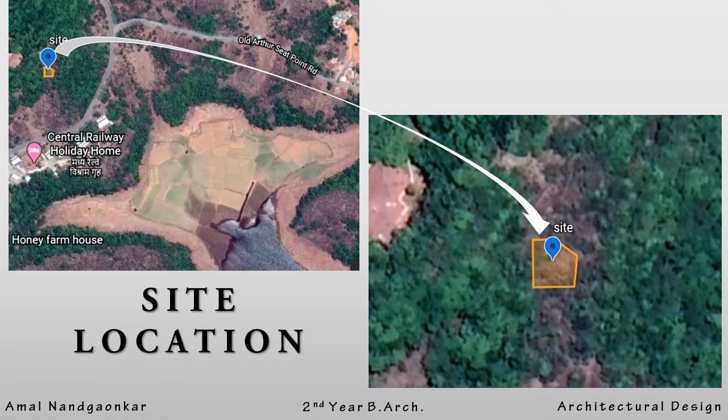The site was located near Venna Lake, had a pentagonal shape, and was situated on top of a hill. I chose a circular format for the cottage to give panoramic views of Mahabaleshwar.

The cottage includes a small cooking area, a toilet, and a living space on the ground floor, with stairs leading to the upper floor. The upper floor has a small bedroom, a toilet and bath, and a lounge area with panoramic views of Mahabaleshwar. The site is also facilitated with car parking.

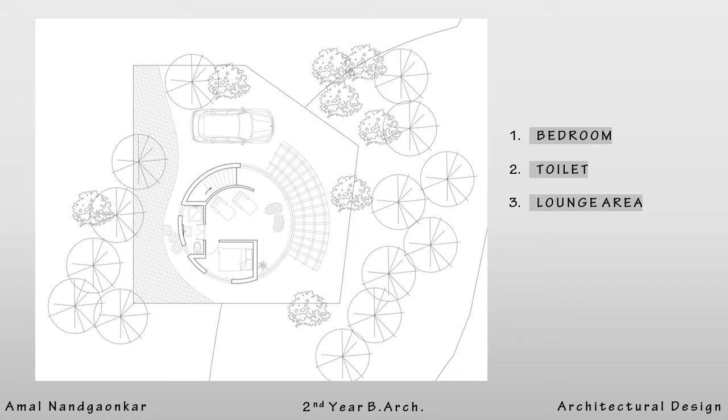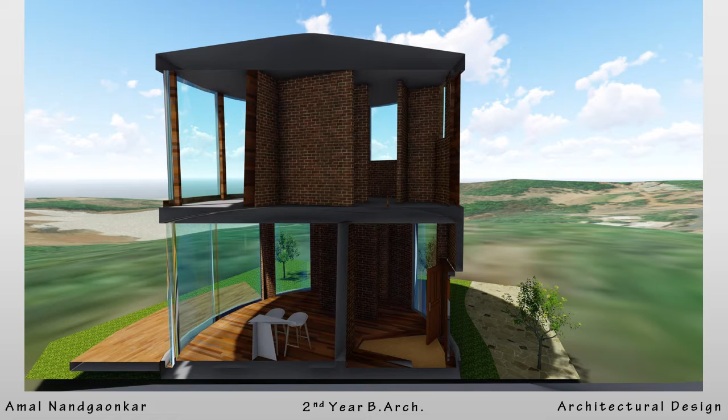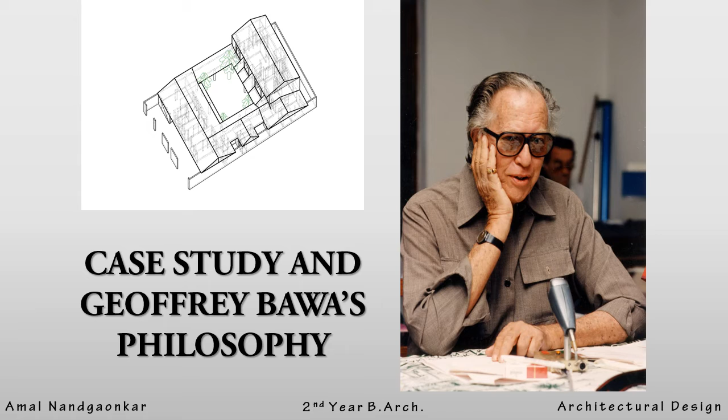My client for the major design project was Geoffrey Bawa. I studied his house known as the Ena de Silva House. In its structure, the rooms are located around the courtyard.

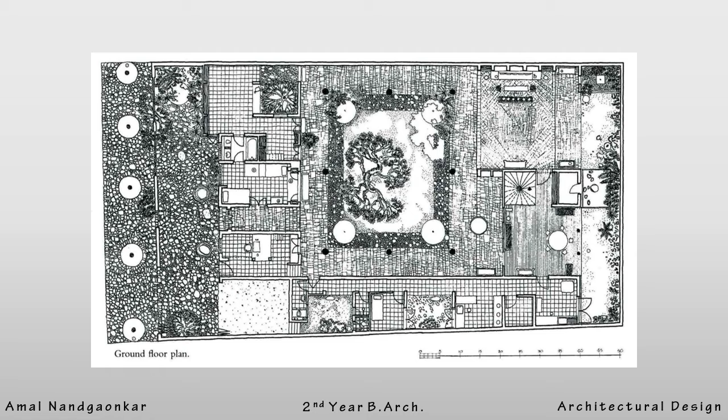The house includes two studios, a painting studio with a kitchen, a big living space, and a big dining space. There is a big tree in the courtyard.

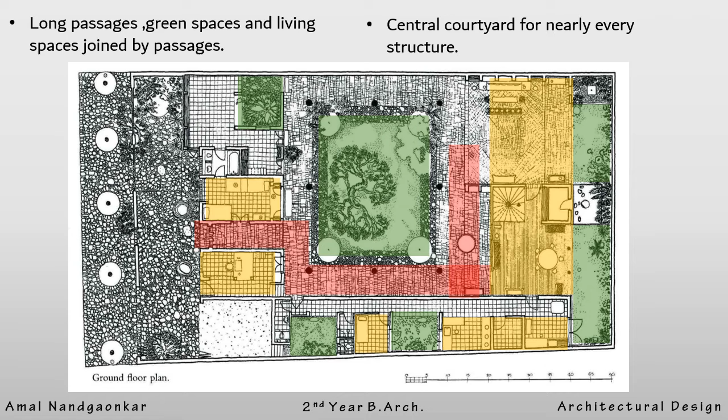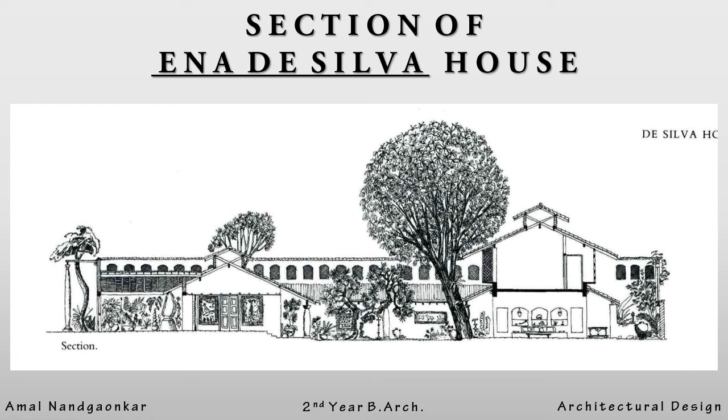This is a typical section of the Ena de Silva House, in which we can clearly see the detailing, the pattern of Bawa's architecture, and the number of green spaces used in a single structure.

Bawa had a different approach toward his projects—evoking the pleasures of the senses in line with climate, landscape, culture, and ancient Ceylon was his basic philosophy. He brought together the Western humanist tradition in architecture with the needs and lifestyle of his own country. The principal force behind this was tropical modernism.

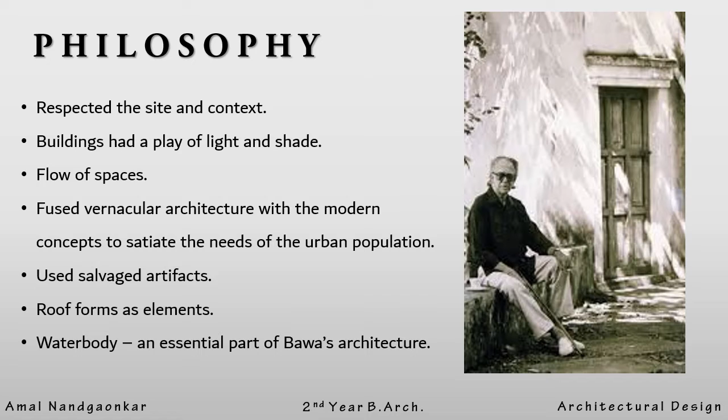He also respected the site context, with a play of light and shade, flow of spaces, vernacular architecture combined with modern concepts, roof forms, and water bodies as essential parts of his architecture.

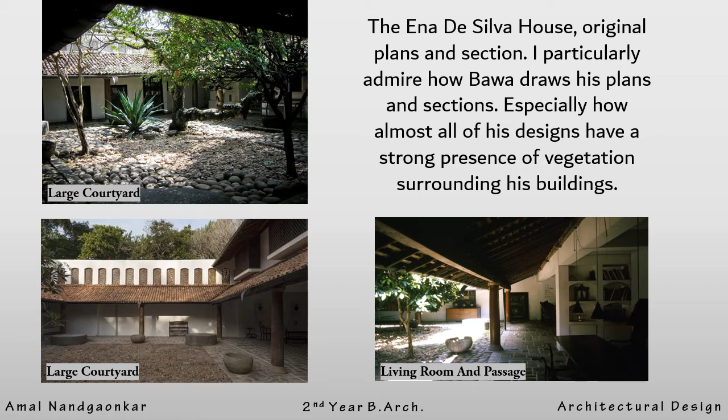I particularly admire how Bawa drew his plans and sections, especially how almost all his designs have a strong presence of vegetation surrounding his buildings.

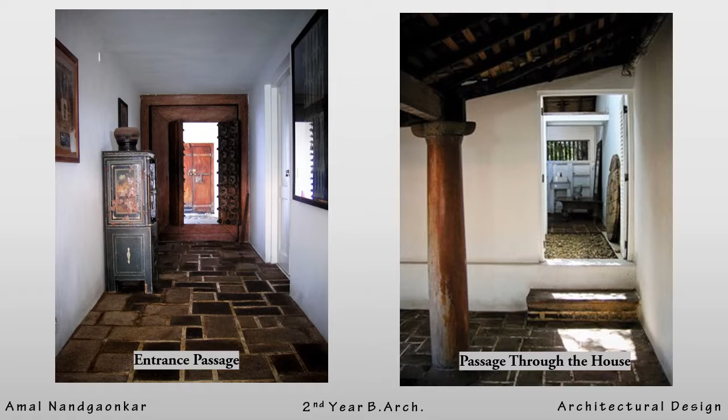These are the two passages.

Now I am going to present my major design project, in which I designed a house for Geoffrey Bawa.

As I mentioned, Bawa was my client. He was born in 1919. He was a lawyer first, and then studied architecture at the Architectural Association in London in 1956.

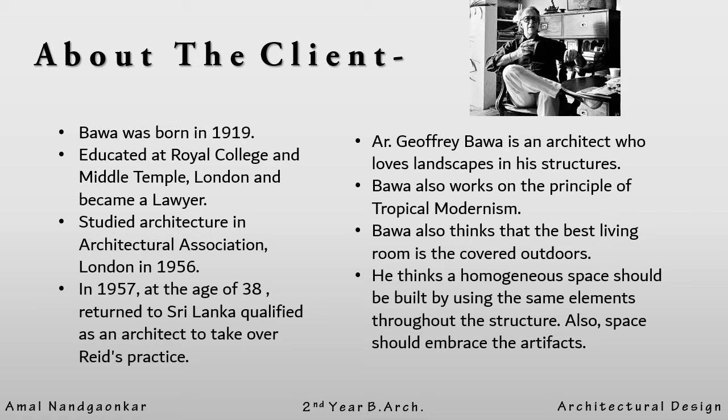Architect Geoffrey Bawa is an architect who loves landscapes in his structures. Bawa also works on the principle of tropical modernism.

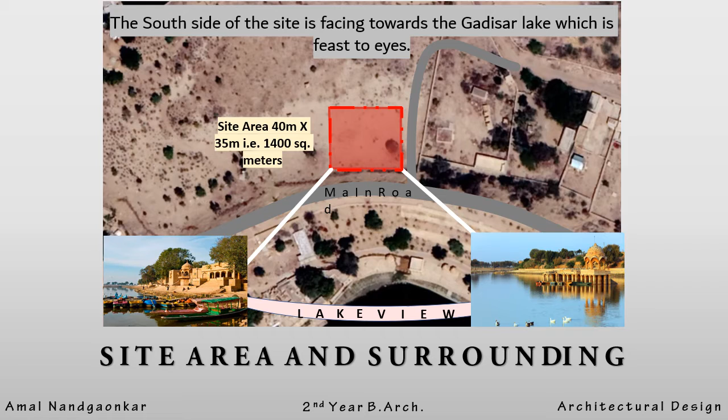The site was located in Jaisalmer, Rajasthan, with a view of Gadisar Lake on the south side. The site was around 1400 square meters.

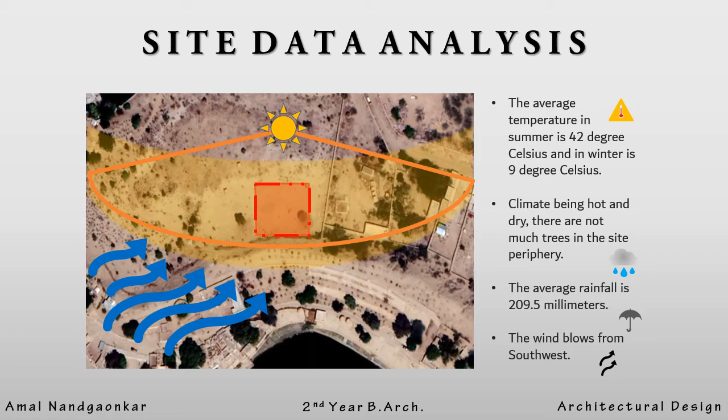In Jaisalmer, summer temperature rises up to 42 degrees and in winter drops to 9 degrees. There is an average rainfall of 209 millimeters, and the wind blows from the southwest.

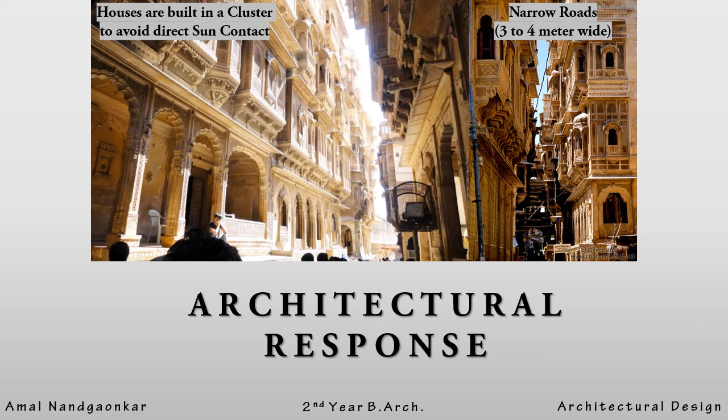To deal with this climatic situation, here are some architectural responses. In Jaisalmer, houses are built in a clustered format to deal with the hot and dry climate and hot air.

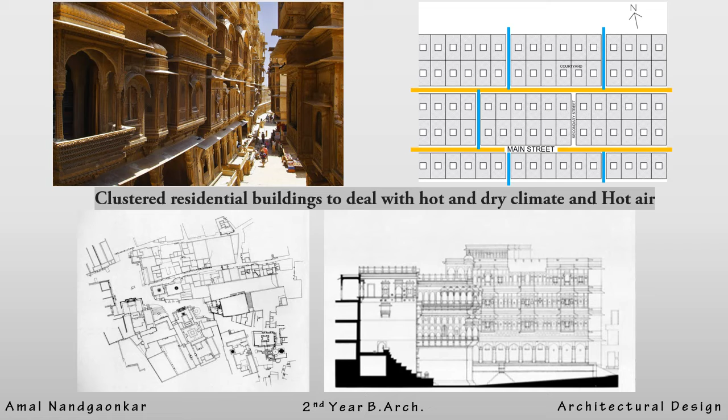This was the case study on Nathmalji's Haveli. I have marked some places according to their use.

The Nathmalji Haveli had two courtyards, and the rooms were surrounded by the courtyard.

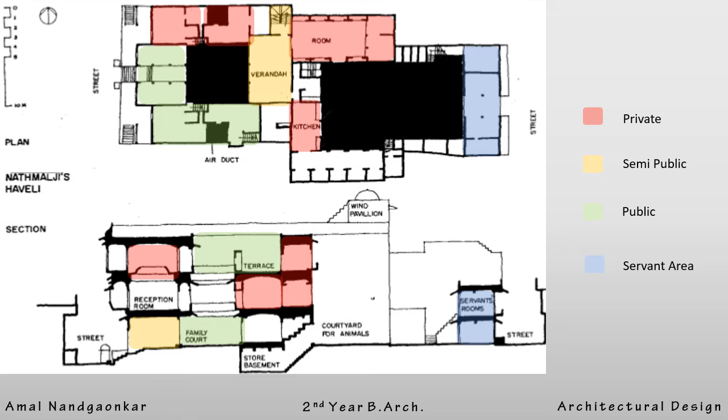This is the architectural response used for ventilation and to maintain cool airflow in the houses, in which they plan air ducts.

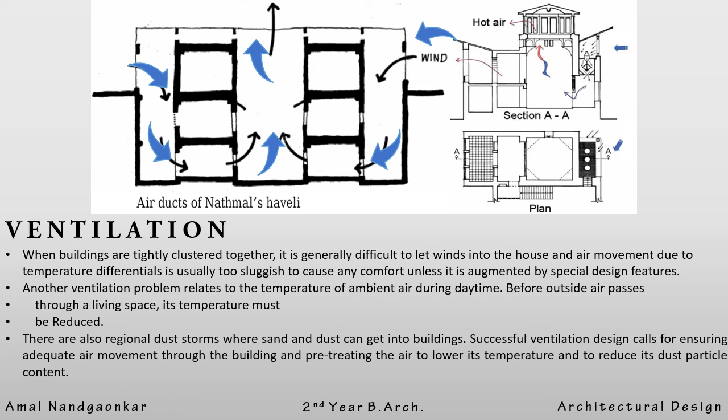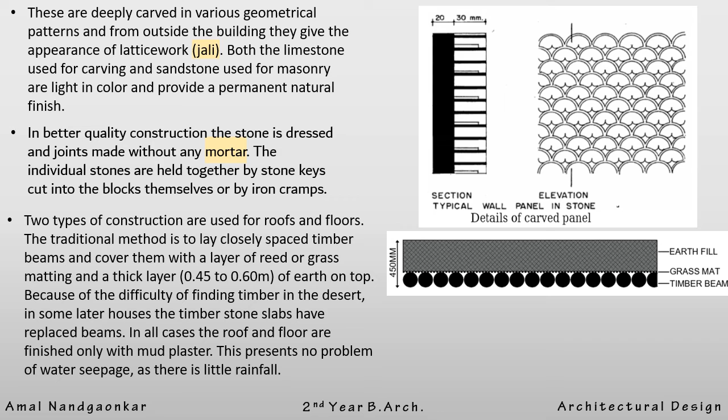Jali is the main feature in Jaisalmer, which does not allow sunlight to come directly inside the house. Also, the roofs are nearly 450 mm thick, with earth fill, grass mat, and timber beams.

Building materials I've used in my structure include Jaisalmer yellow sandstone, which was the basic material in abundance. Bawa also used materials that are locally available.

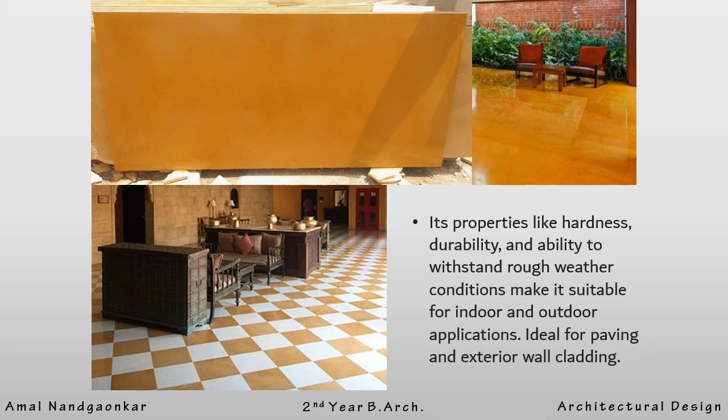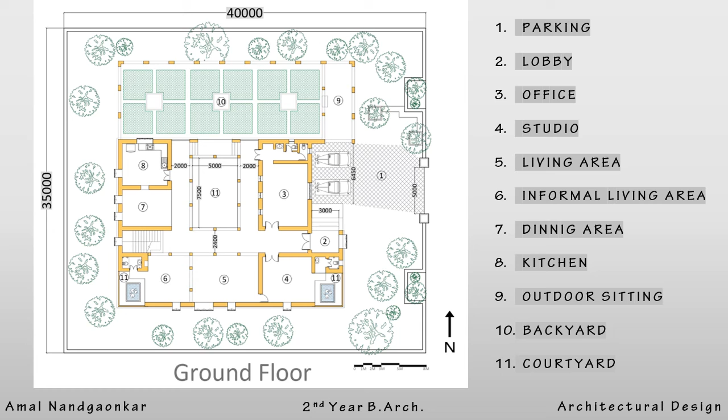This is the furniture layout for the ground floor.

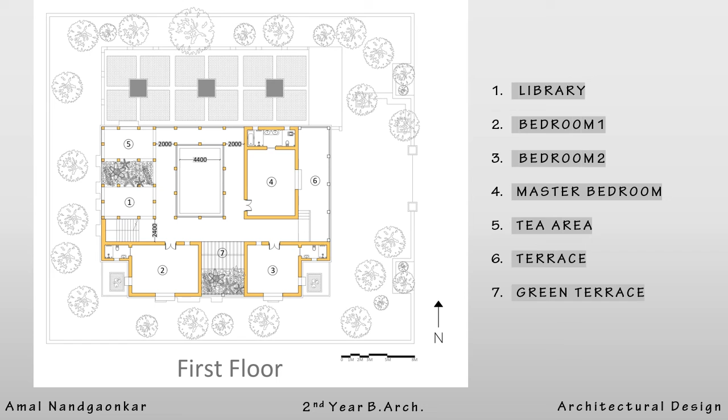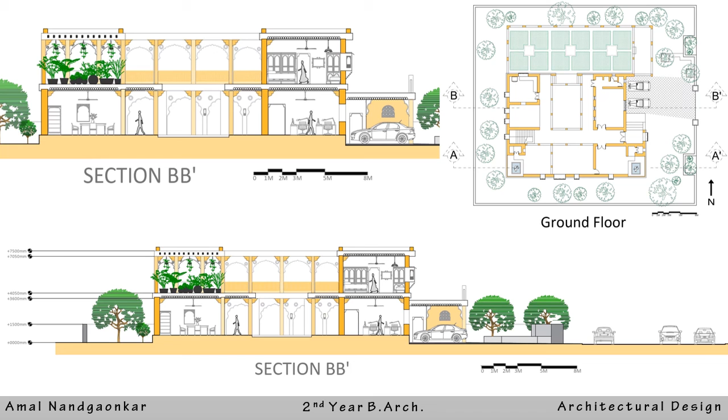Section BB shows the second green space, car parking, and a view from the office.